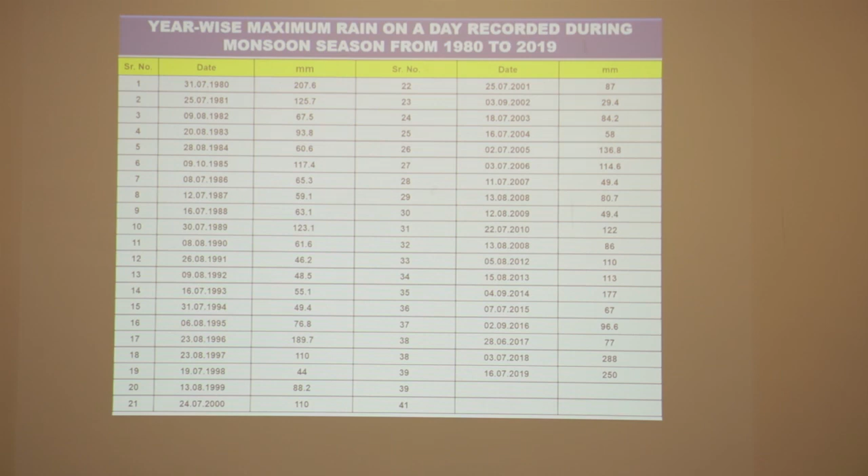On 3rd July 2018, we required 6 hours to get the water cleared, and this year on 16 July we required 5 hours. Generally, whenever the rain stops, WASA forecasts on the media how many hours will be required to clear the water. The same data you can see here.

Generally, the world over, these are the patterns to handle rainwater. It goes underground through infiltration where we have open lands. It is transported through drains to water bodies like rivers. Rainwater storage is also a concept, and rainwater infiltration into groundwater, called harvesting, is also one way forward.

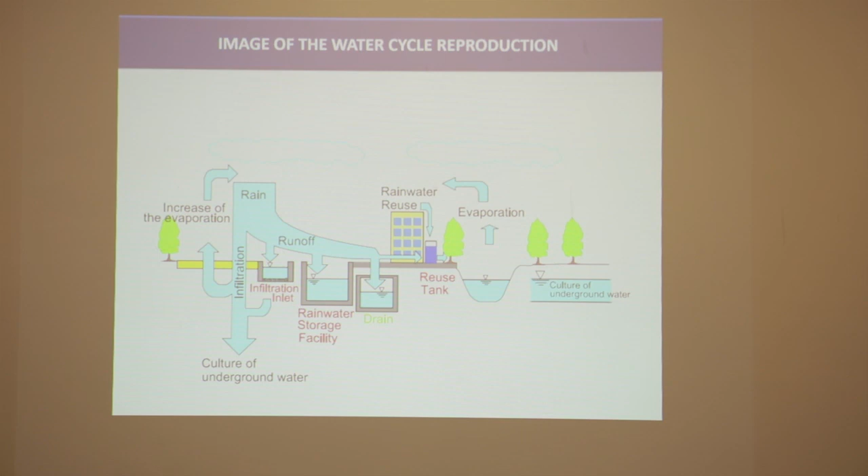On the right side of the slide, you can see the reuse of rainwater for many other purposes - washrooms, toilets, gardening, sprinkling, car washing. These things may happen at smaller scale as well as bigger scales.

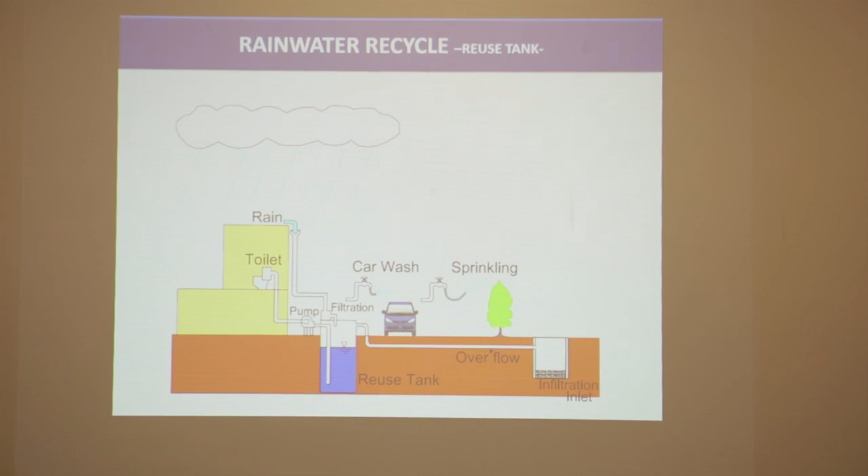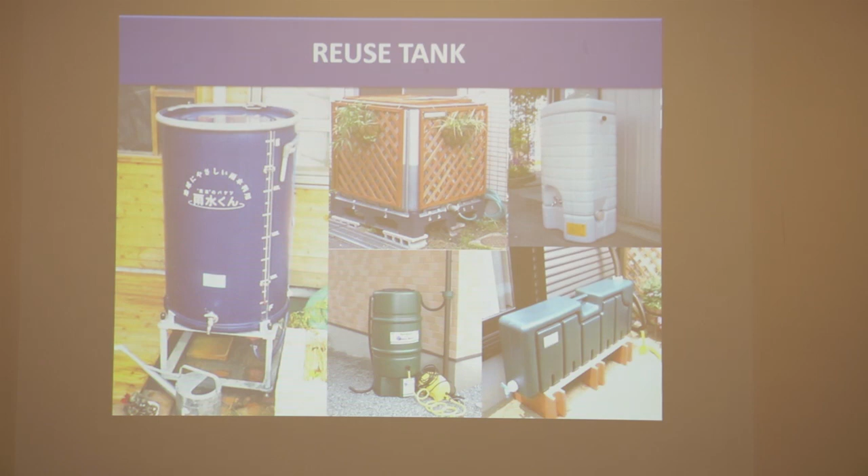These are actual pictures of tanks in Japan, household type storage, as my colleague was mentioning, and then infiltration tanks to take this water into the ground through street pondings.

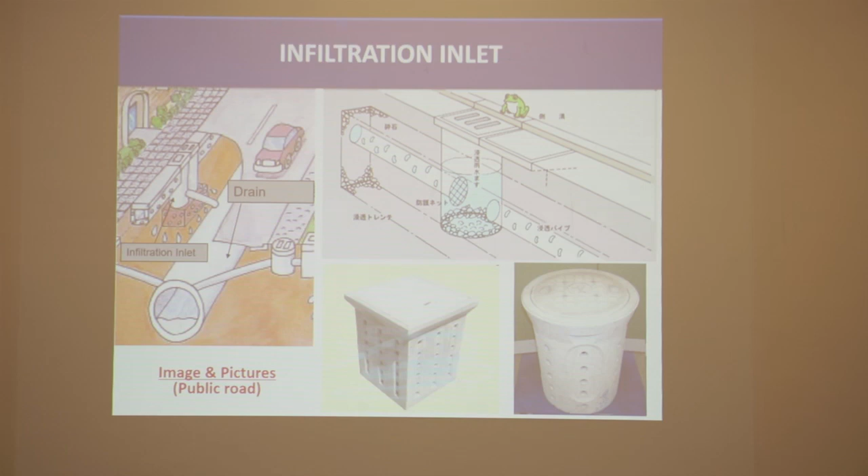These are infiltration strategies, but every city is different from the other - the soil, the type of infiltration available, groundwater. All these parameters differ from city to city, so one solution is not for every city.

These are the parameters we need to get water into the soil. We need certain permeability or infiltration rate available in the soil, otherwise water cannot go down. If you want an inverted well to take water into the soil or groundwater, it has to be 2 feet above the water table - we don't want to pollute our water table, which is very precious and good quality groundwater.

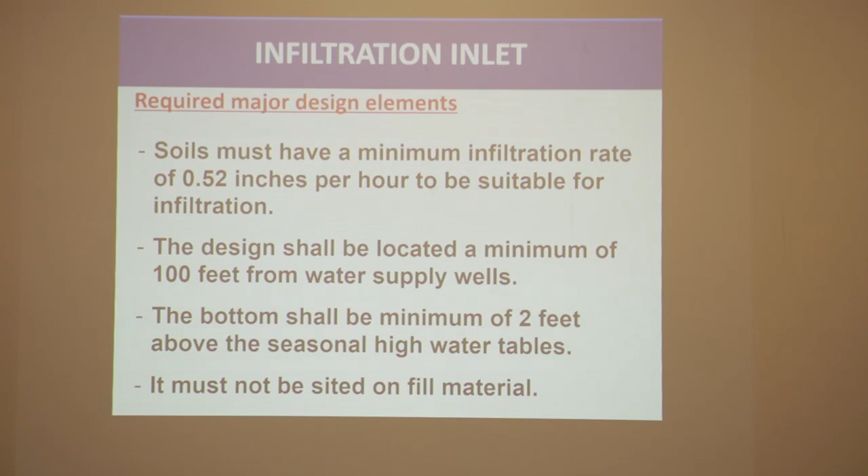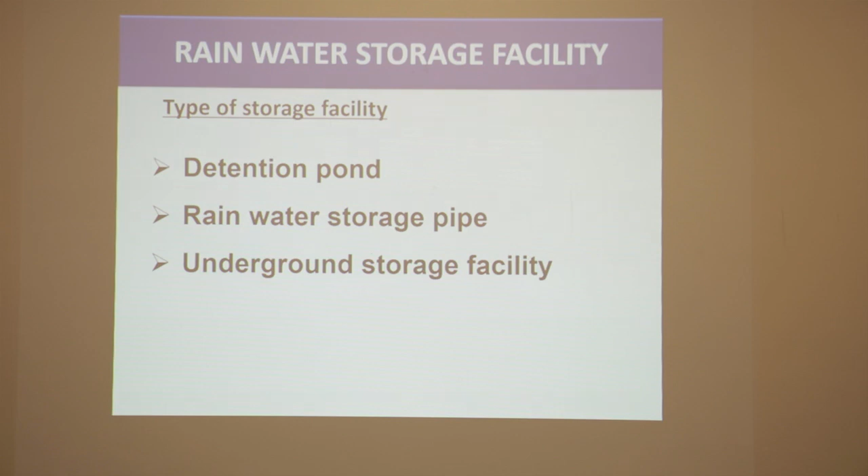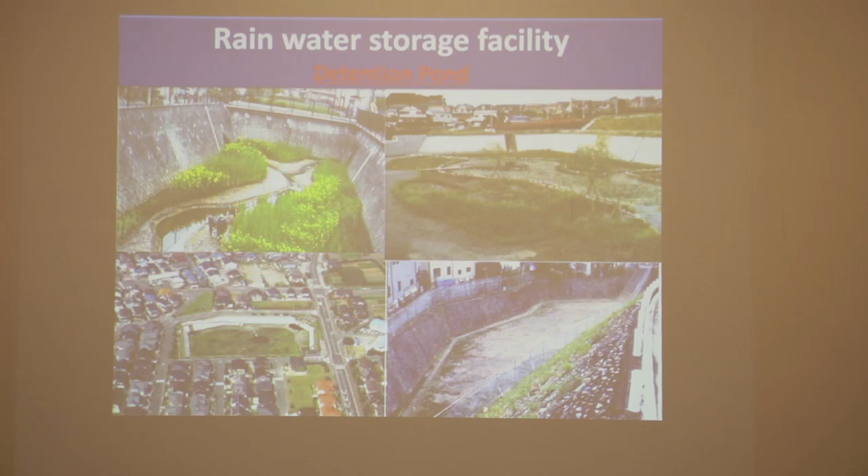You will be glad to know that this year we are constructing one of these facilities at Lahore too, at Lawrence Garden, because we have a low-level road near Lawrence Garden, near Lahore Board of Intermediates. That is the place where water from 5 roads comes - even the Charing Cross water and China Chowk and all sides - water first travels to this point. We'll have storage there this year so that water is not on the road but in storage, with a capacity of 1 million gallons.

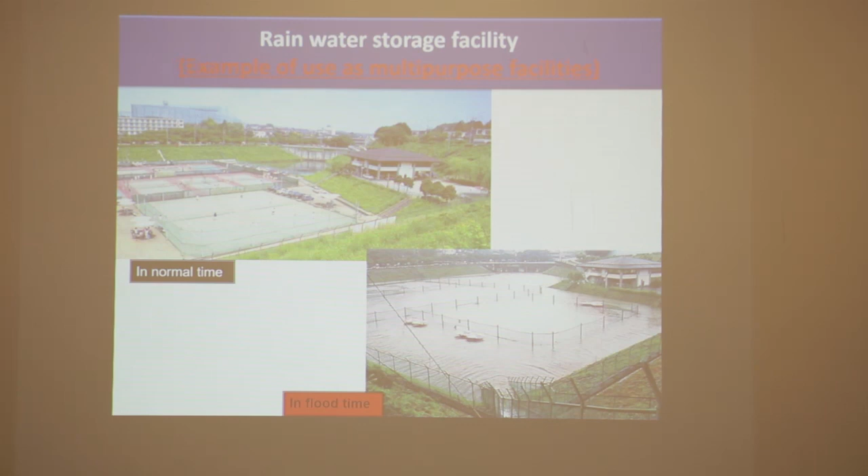In Paris, they also have a storage facility below the road - beneath every road, they have a storage pipe.

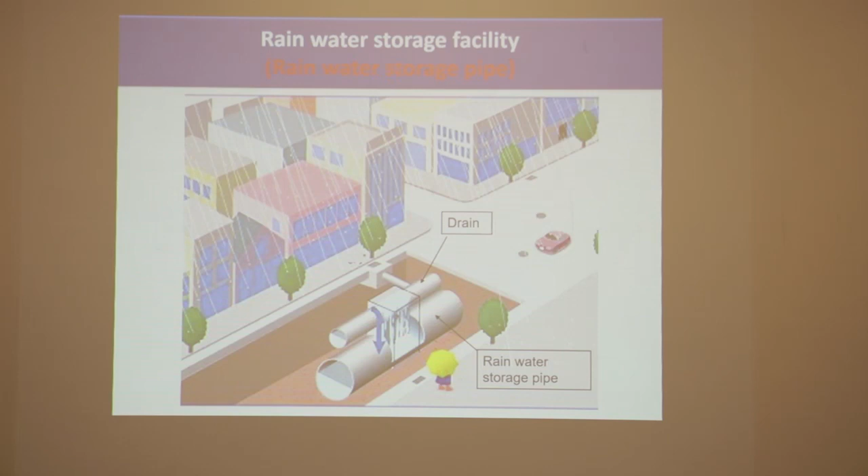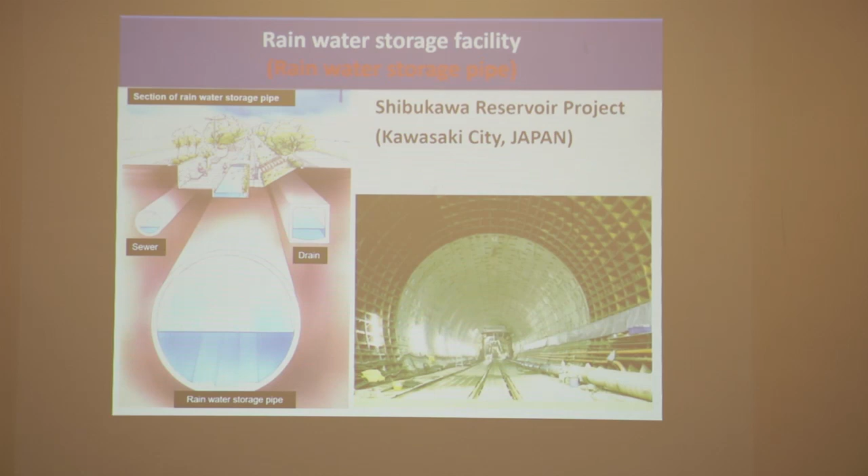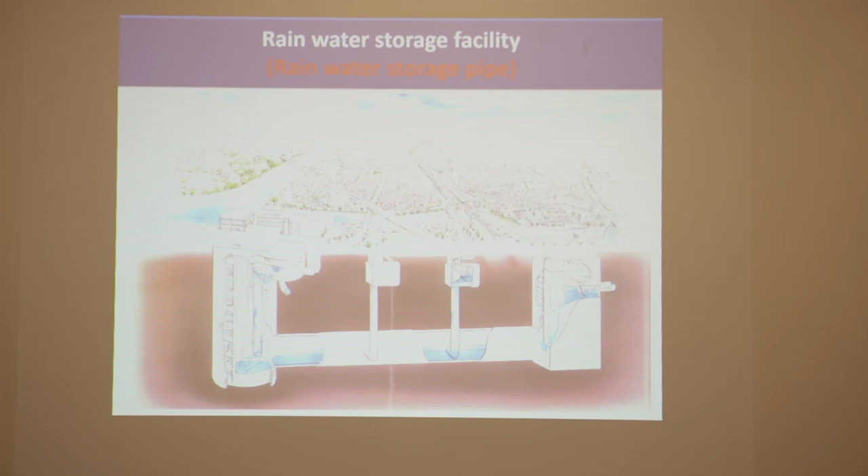You can well imagine that such a huge investment is involved in this kind of structure. This is another way of expressing the same concept: there is a city, then you have a storage, and they take out water when needed through pumping.

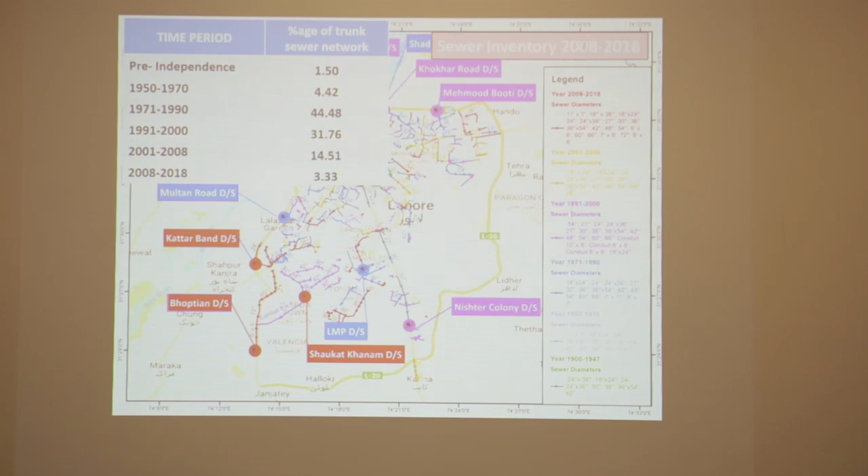From this analysis you can see that before independence, 1.5% of the total infrastructure was there, and the maximum investment was made between 71 and 90. This is the period when the Lahore Development Authority was established, WASA was established, and a big infrastructure was laid. Then in the next decade, 91 to 2000, 31% of infrastructure was added, and in the rest of the period we don't see any big investment or extension. In central Lahore we are still working with the British period infrastructure.

So now there is a proposal, because vertical development is taking place in the southern part of Lahore—Gulberg, Garden Town. All these areas are being developed vertically, and the infrastructure here is for residential sewerage load. The main boulevard of Gulberg had its sewerage laid in the early 70s or late 60s, when Gulberg was developed for residential purpose only. But now it's not a residential area, so we have this project.

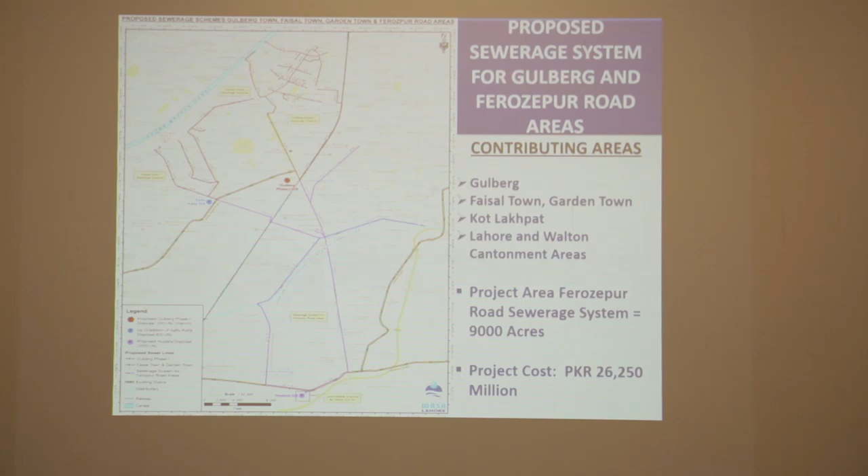Ultimately this water infrastructure has to be laid by spending 26 billion rupees. This year LDA is kind enough to provide this money, because previously we were looking only towards government, but now LDA is taking a lead by using their properties, selling some plots to raise this money. Then there is another infrastructure project in southern Lahore which requires more money, 37 billion.

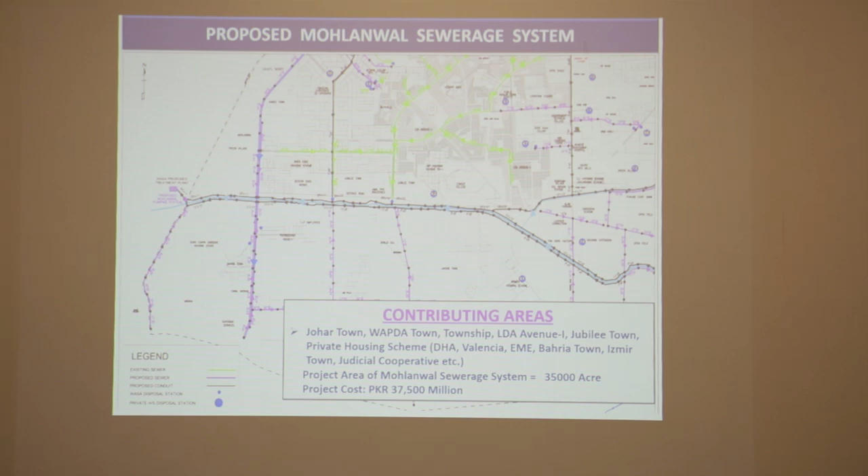This is Iqbal Town. You can see a nala or drain at Iqbal Town. This drain shouldn't carry domestic sewage; it should carry only stormwater. So in parallel, this line will be constructed at a cost of about 4 billion, along with a pumping station at the terminal point.

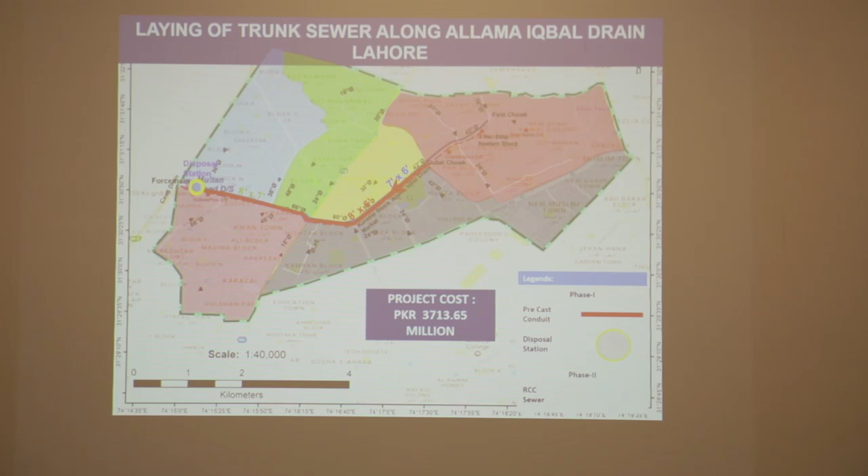So all these plans are in the pipeline. This one is first of its kind in Pakistan—laying of a sewer line through a tunnel boring machine without digging. A jacking machine will be used to install this pipe in central Lahore, which has the British period sewerage system. The project has been approved by the central CDWP last week, and next week the ECNEC may approve it.

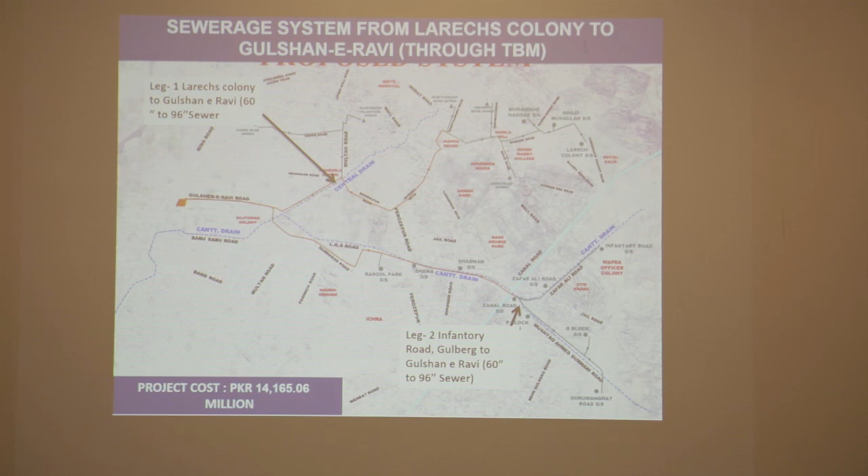This is an Asian Infrastructure Investment Bank project. 14 kilometers of sewer line will be installed in the central part, because we do not want to dig the roads and spoil the city's infrastructure. This will be no-dig technology, and central Lahore inundation will be reduced. Then for the stormwater network, you can see 124 kilometers of main drains we have in the city.

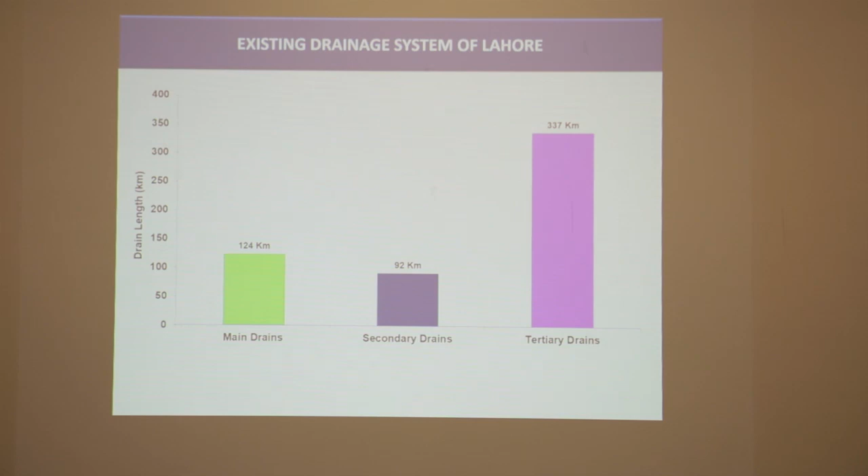And we can have some tilapia fish also in the canal, in the drain, so that dengue larvae can be eaten up by the fish. We have some zones, administrative zones for the drainage system: north, central, south.

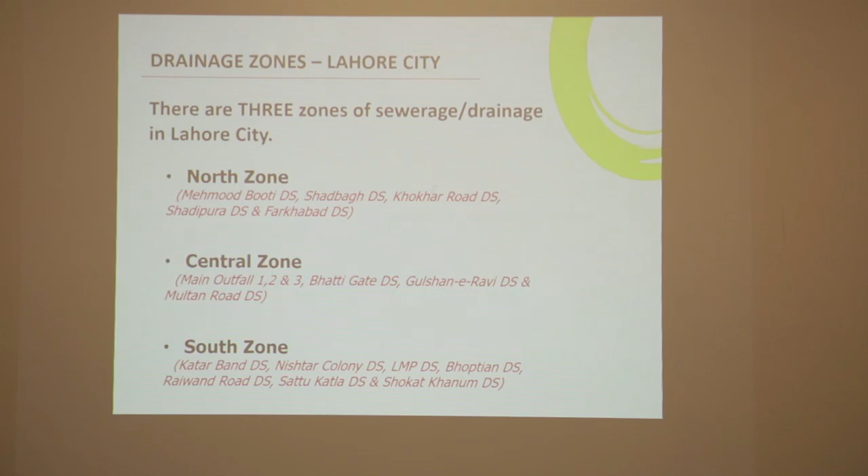North zone was improved a lot before 2000, so nowadays whenever there is rain, you don't hear much about northern Lahore. You mostly hear about central Lahore, Lakshmi Chowk. But North Lahore is quite better now. Nakhda Chowk is no more a ponding area because of this infrastructure.